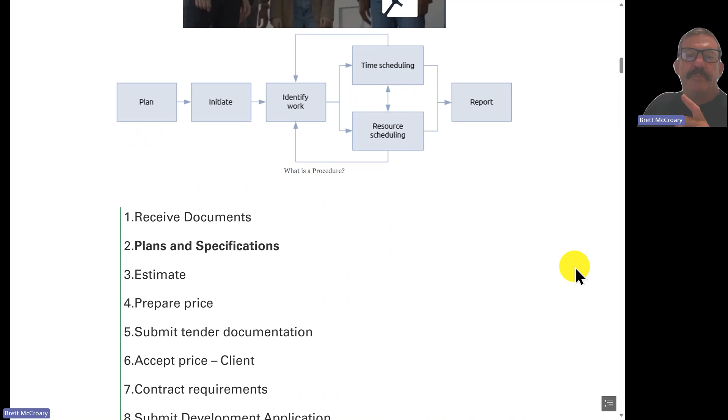Just to get an understanding, some of the documents required in construction are quite in depth, and this is not inclusive. You receive documents, your plans and specifications, you estimate, you prepare your price and submit your tender.

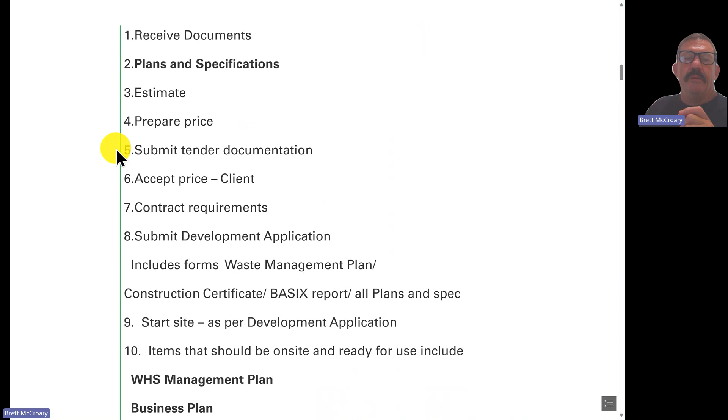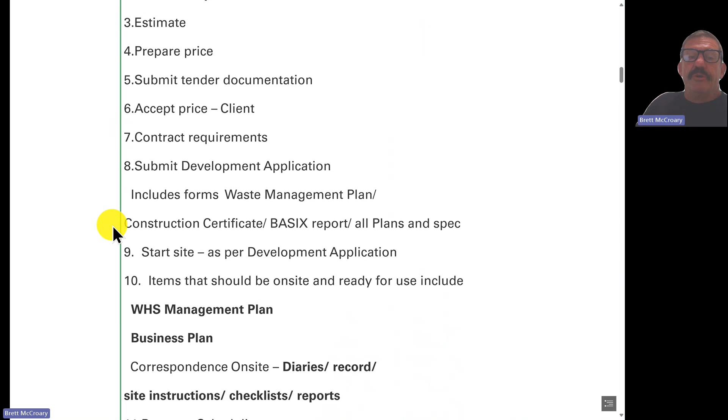Your client accepts the price, you sign your contract, and the DA was either submitted before or after—including things like your waste management plans, your BASIX reporting, all your plans and specs. Then you'll receive a construction certificate that permits you to start building.

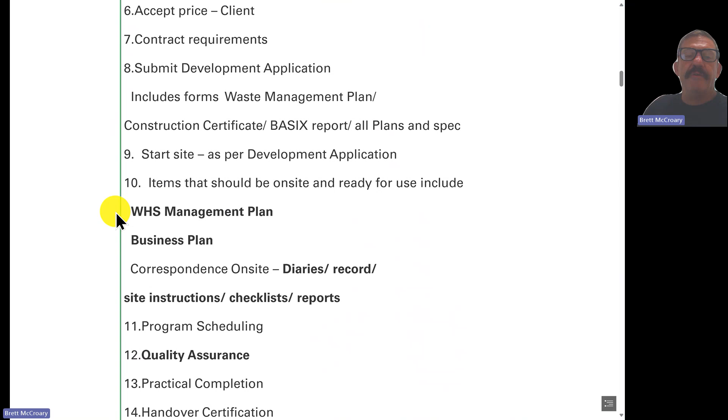Starting on your site, so you've got your DA, you've got your CC, then you can begin. Then you must have your WHS management plan. Any project over $250,000 will need a WHS management plan.

A business plan is just something you need to have yourself—make sure you have an understanding of where you're going the next 5 to 10 years.

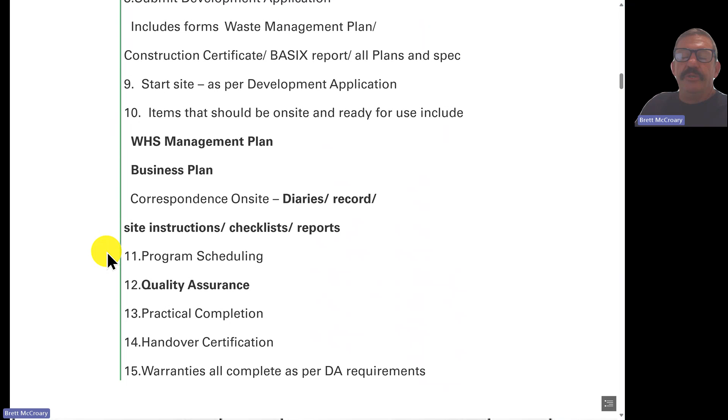Correspondence: you're going to have diaries, record keeping, site instructions, checklists, reporting, program scheduling, maybe a Gantt chart, Microsoft Project—you'll be using these. We'll do a few lessons on those.

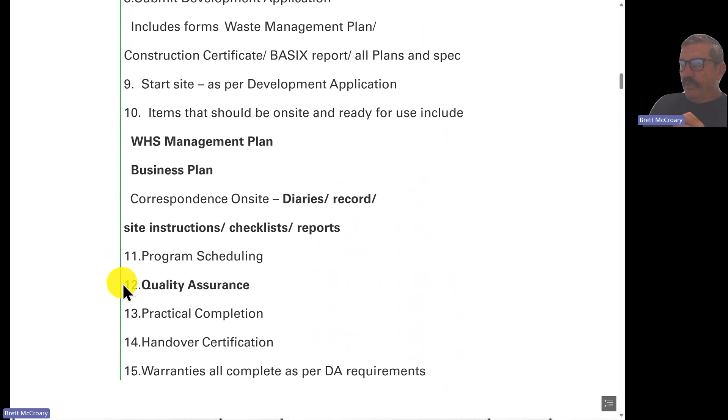Quality assurance—I'm going to really go into this one in depth now, just so you can have it practically: practical completion, handover, and so forth.

So what is quality control? It ensures products and services meet standards by measuring quality, comparing results to set benchmarks, and correcting any deviations.

Now I've got some links here which I'm going to show you. Designing Buildings goes into it in depth, and it's actually not a bad website. It's probably a little outdated, but it gives you an understanding of where it's going with ISO 9001, and I'll discuss that in more depth later.

Alright, so I'll just simplify it. Quality assurance is procedures and systems put in place to ensure the quality of a product.

The importance of it is based on the principle of getting things done right the first time, by implementing, maintaining, reviewing, and continually improving a quality assurance system. A company can achieve and reap the benefits of having such a system in place. Now you've got to be careful it doesn't get bogged down with too much red tape—I find that's a big deal.

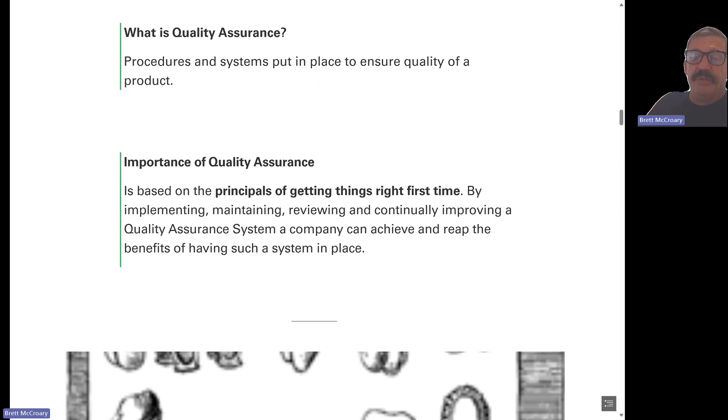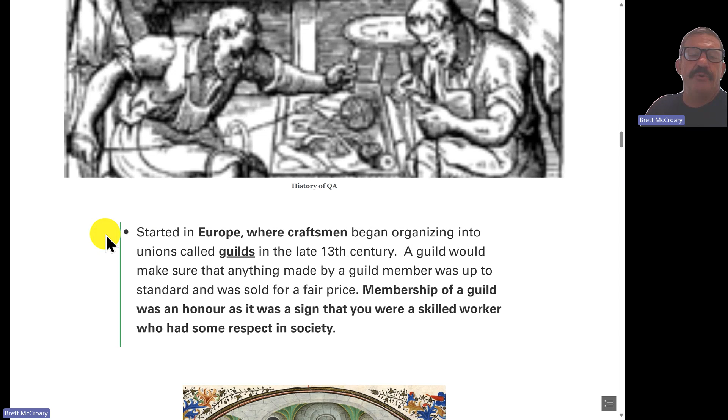Just briefly on the history of it: it really comes from back in Europe, in the 13th century, where craftsmen started an organization or union called guilds. They would make sure anything made by a guild member was up to standard and sold for a fair price. Membership of a guild was an honor, as it was a sign that you were a skilled worker who had some respect in society.

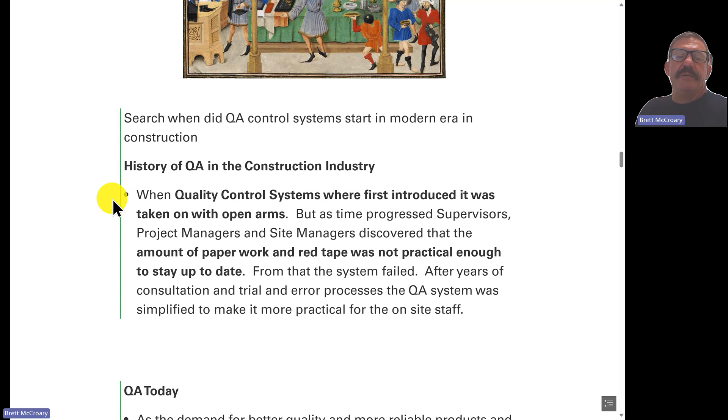Quality control systems were first introduced and were taken with open arms. But as time progressed, in the 80s and 90s, supervisors and site managers discovered that the amount of paperwork and red tape was not practical enough to stay up to date. So the systems failed. After years of consultation and trial and error, the QA system was simplified to make it more practical for on-site staff.

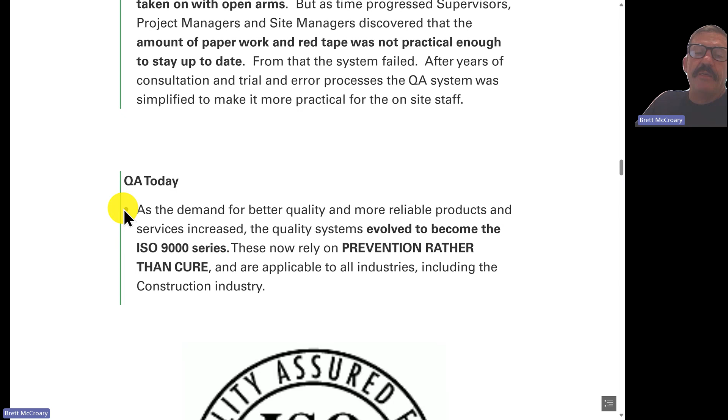As the demand for better quality and more reliable products increased, the systems evolved to become the ISO 9000 series, which I mentioned before. These now rely on prevention rather than cure and are applicable to all industries, including construction.

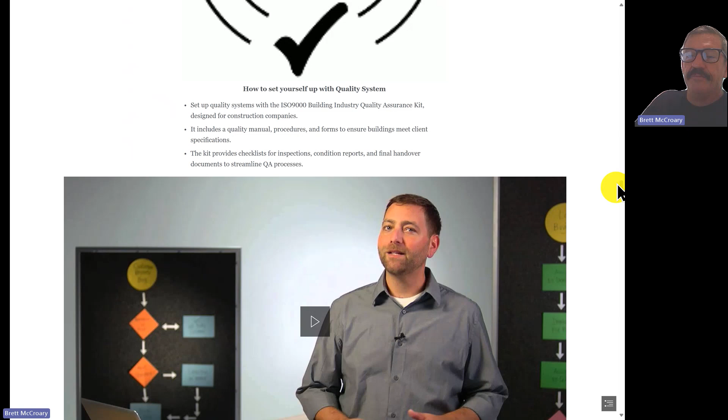So implementing QA in your company, right? So slowly developing your policies and procedures for the benefit of your company. So if you're a startup and you're small, you just want to slowly build it up, but have an understanding about it.

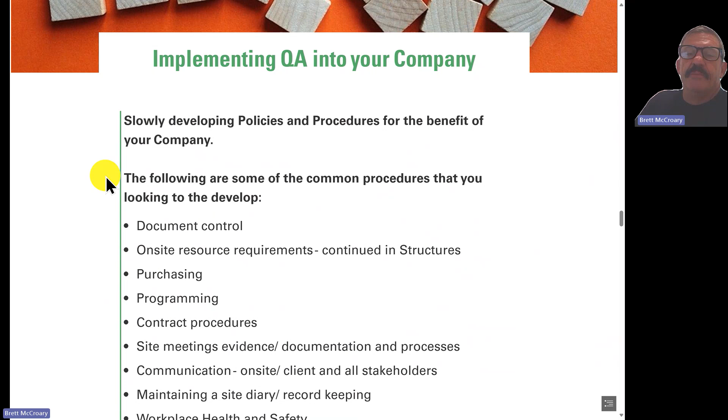The following are some of the common procedures that you look to develop within your company. So you're going to get your document control. You need to start improving that over time. On-site resource requirements, purchasing, programming, contract procedures, how you do things, site meeting evidence, communication on site with your client, subcontractors, your stakeholders, any other stakeholders.

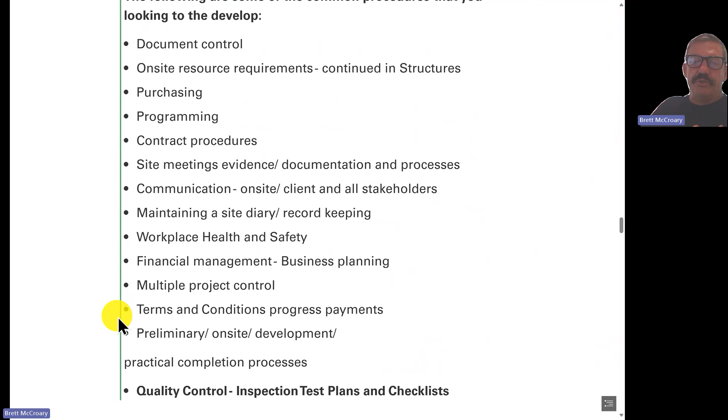Could be an inspection, could be a certifier. Maintaining your record keeping, WHS, business planning as discussed. How do you actually look after multiple projects? What's your T's and C's for progress payments? How do you do that?

Okay, and then look, I'm going to briefly touch on a couple of them, but quality control, inspection test plans and checklists.

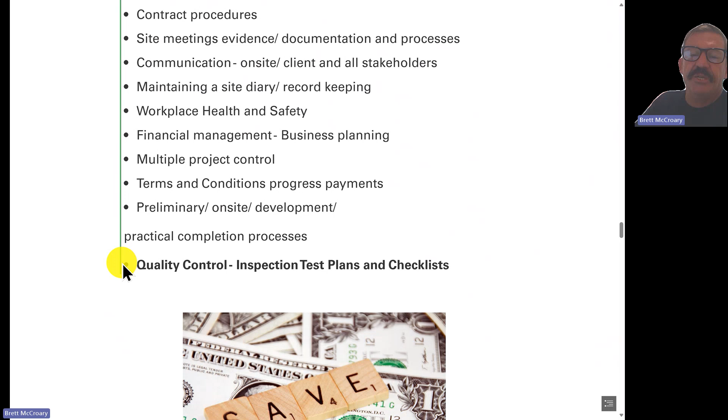Can you develop these? Like, how do you get these to help you? Let's be practical. This is where I want to be really practical. If we go out in the construction industry to work for ourselves, we won't spend a lot of time on quality systems. We just want to build and earn.

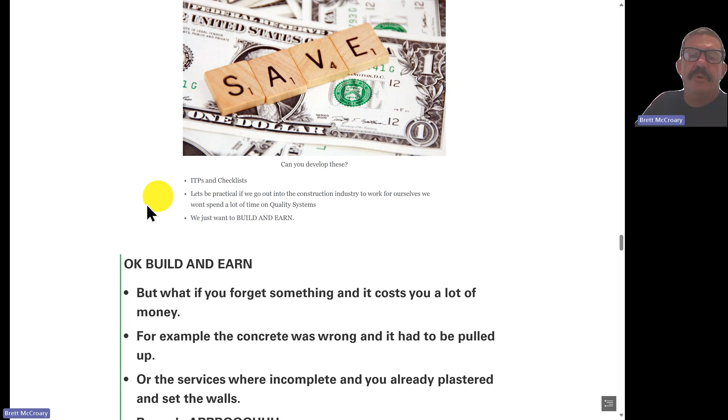So a little bit of tongue in cheek here. You know, if you forgot something and it costs you a lot of money, you could be reworking. Concrete was wrong. I've had heaps of jobs where I go at night, can't sleep because I'm not sure, or I'm worried about whether it's the correct concrete, it's the right MPa, it's the right aggregate. It's always stressful.

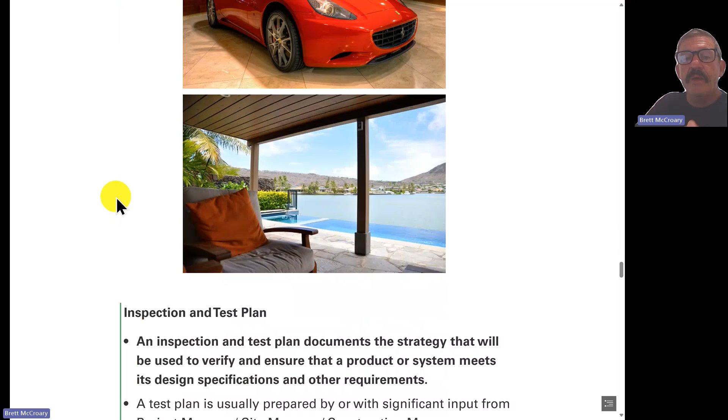Well, the service is incomplete. You'd already plastered the wall. So rework, it's painful. You're going to lose money and not be able to afford those fancy cars or fancy holidays. This is where you try to use quality assurance to help you.

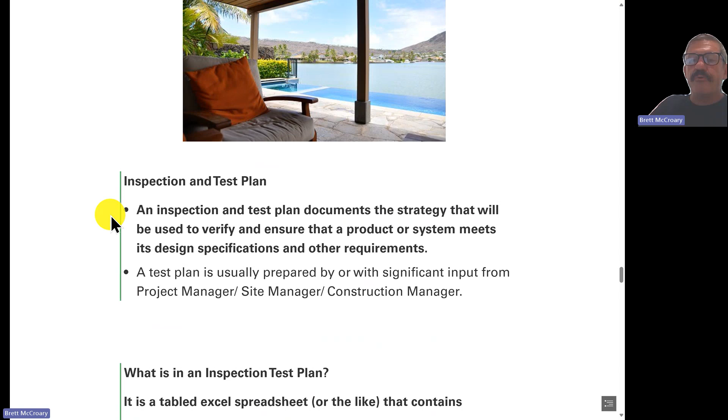As an example, an inspection and test plan documents the strategy that will be used to verify and ensure that a product or system meets its specification requirements.

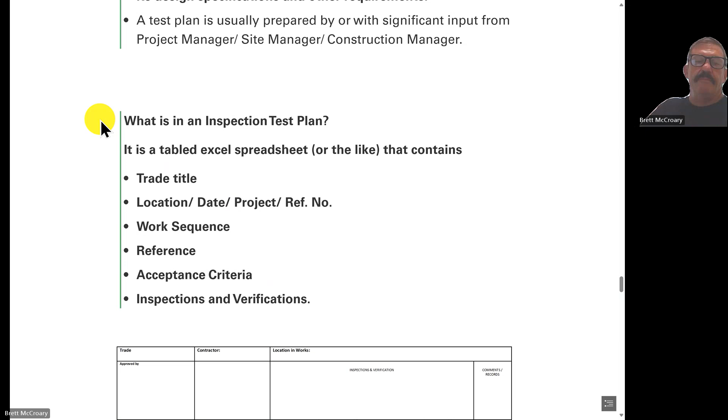Okay, here's a simple breakdown of one. Your trade title, location, your date, work sequence, your referencing. Okay, I've got an old one here from a company that I used to work with. They have actually allowed me to use it. Work activity, referencing, acceptance criteria, some of the inspection verifications.

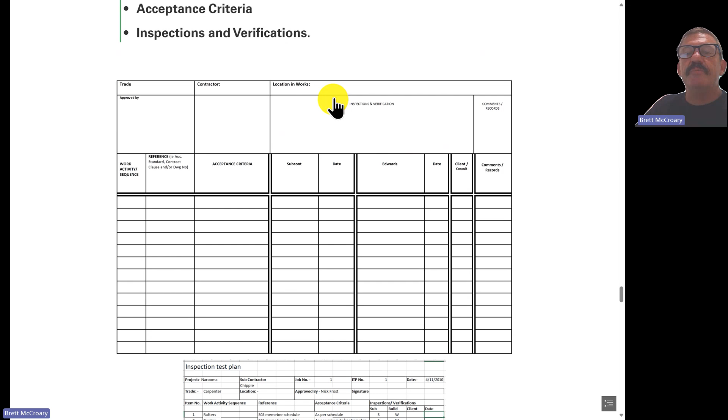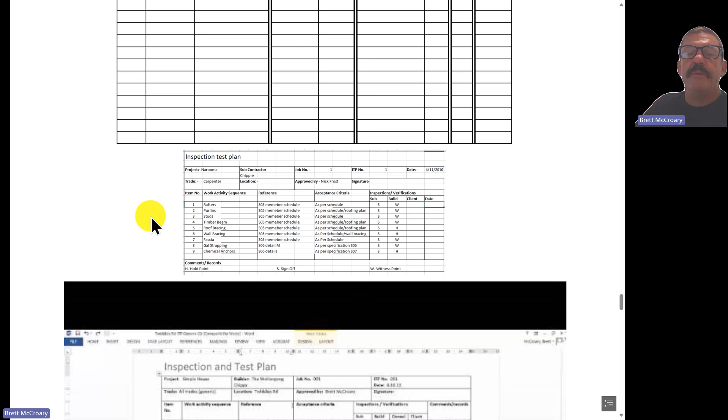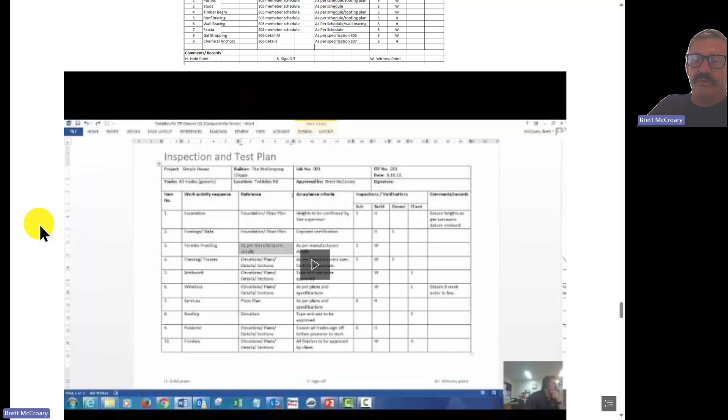Okay, whether it's a hold point, you can just see it down on this one. Number S for sign off or a witness point. Had a really good job we did down at Narooma many years ago, and I used that quite extensively just to check off and sign and make sure everything was fitted correctly. There's an old YouTube clip with regards to that. I did that a good 10, 15 years ago. I'll have that on the description.

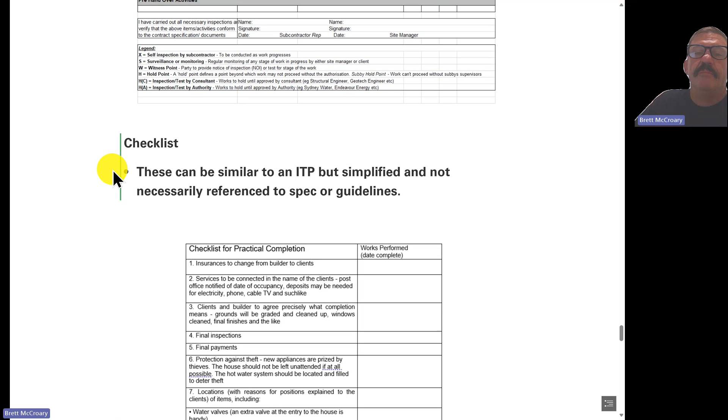Now, checklists. So these can be similar to an ITP, but simplified and not necessarily referenced to spec or guidelines. So as an example, I've got a checklist for practical completion. So just look at some of the items, insurances, services, clients and builder to agree precisely what completion means.

Like, is there landscaping included in the contract? Final inspections, your payments, protection. So when you hand it over, you need to make sure the insurances are resolved.

Water valves, your electricity meter - everything's ticked off. This is a bit of an old-fashioned one, but it gives you some prompting and understanding to make sure everything's signed off.

Could you develop a checklist for these resources? Could you use the drawings as a checklist? You could - I really like it.

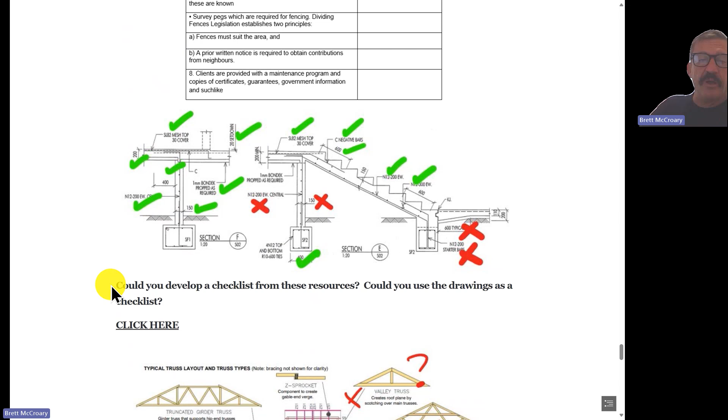I won't click on here, but this is from Pryda, some of their resource guides. And I just put the question out - could we use this as a checklist as well?

So the actual truss layout plan, you could tick them all off. You could see the C1, the C2s, your girder trusses, some of your saddle trusses or valley trusses - have they been fitted correctly? Some of your Z sprockets, okay? You're signing that off and ticking off that it's complete.

I've just had an example - there's a circle there with a cross. Possibly the valley truss had to be made. Is that going to be an issue? I don't know, but it says it's been documented.

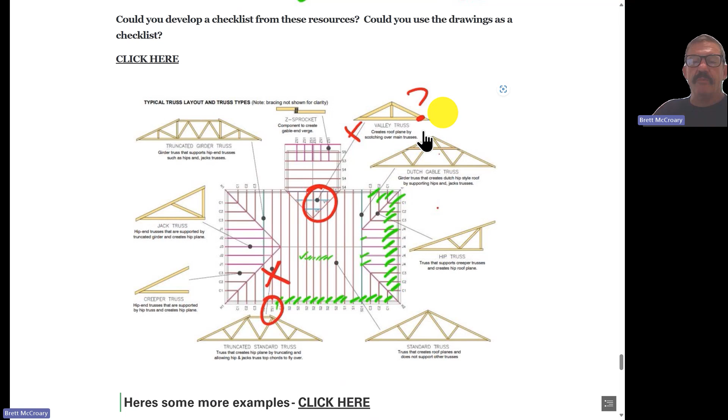I've got another couple that I've just highlighted. So you could have a checklist for some of these, like a pre-sheet. That would be awesome to have a checklist just to make sure the work is complete before you plaster all the walls. A pre-slab inspection, I really like that one - having it prepared, checking everything before the actual pour.

What I am going to show is AS 3740. So for this instance, I've actually been chatting to ChatGPT. You can see it's quite detailed.

I've asked ChatGPT, my building buddy that I created, can you please complete a comprehensive checklist to verify that waterproofing in a Class 1 building bathroom with a separate shower, bath and toilet complies with NCC Volume 2, the Housing Provisions and AS 3740. Can you write this with no spaces, no emojis, and no bullet points or check boxes so it can be dropped into a Microsoft form and completed on the user's phone?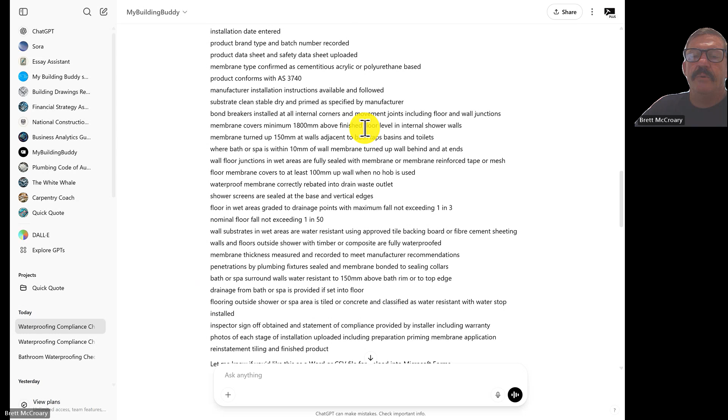I actually had to change it and asked it to write each point on the next line so I could just drop those in. Now I'm going to show you how it looks.

I also highly recommend for you to use the Building Tools app because you can see the pictorials. I've added it on the back of the screen so you can't see all of it, but I can just quickly go back to it.

As an example, going to go to the home, click on Wet Area Overview, and it gives you the overview of everything required within the bathroom. Over time, you want to be an expert in understanding all of these items - they need to make sure it's compliant as per the housing provisions and AS 3740.

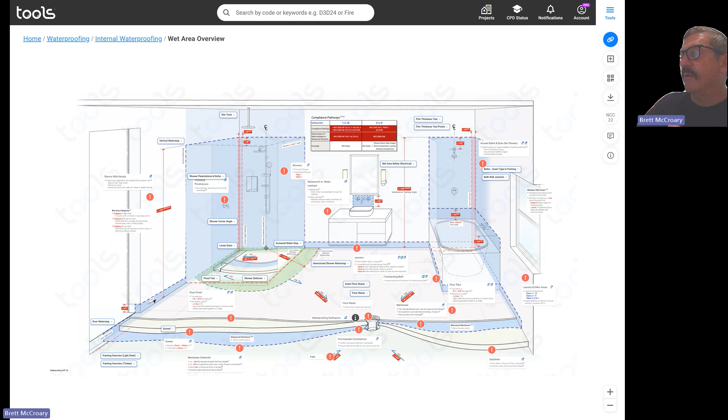Alright, I'll just quickly go back. I'll do this on mobile phone because I would prefer people to use it on their phone. Put your details in - firstly, the heading is that you complete your Class 1 bathroom waterproofing compliance checklist.

I'm going to scroll down here - your address, your licensing, installation date, product, date, safety data sheet, product sheet. Well, there's an error there, I'll get rid of that. Membrane type and confirmed - is it compliant with AS 3740? Manufacturer instructions available and followed. Substrate clean and stable, dry and primed.

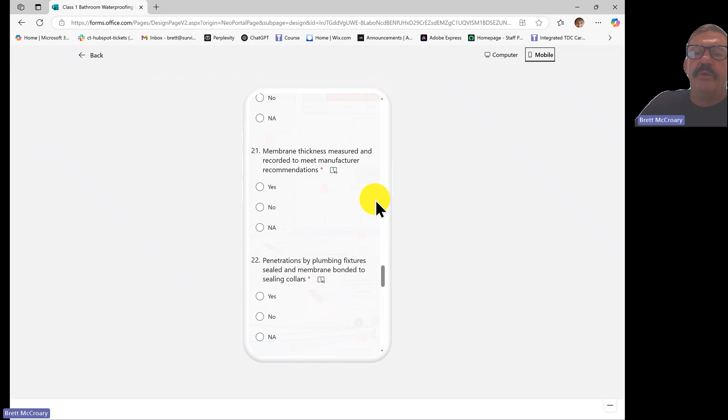Bond breakers installed. Membrane covers minimum 1800 mil above finished floor level - yes, in the internal showers. Yes, no, or NA. I've got a good 25 to 30 questions just to confirm that you're going to check off on that. Now you could do that really quickly on your phone.